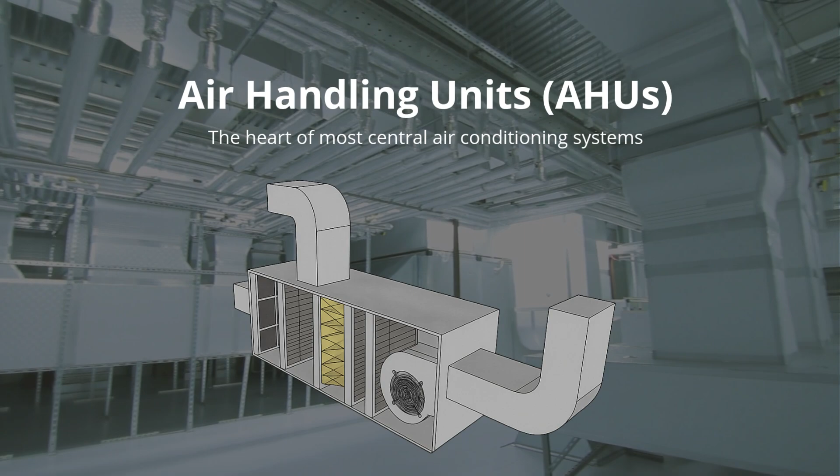Air handling units, or AHUs, are essentially the heart of most central air conditioning systems. They regulate airflow, temperature, humidity, and air quality, making them critical in a wide range of environments.

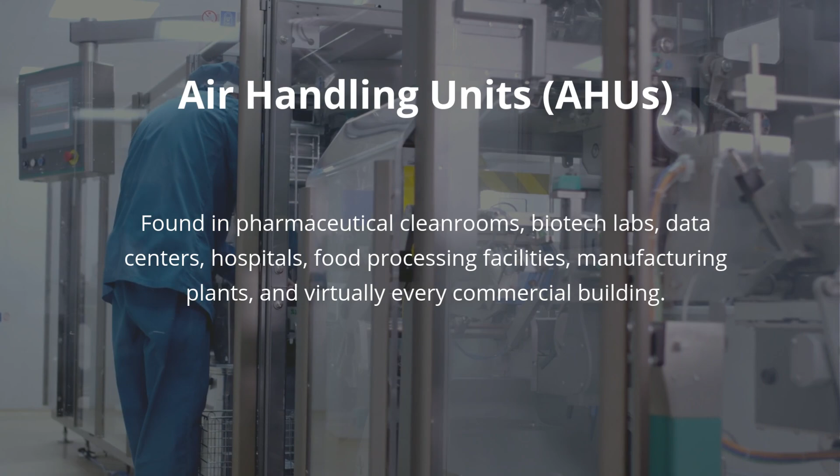You'll find AHUs in pharmaceutical cleanrooms, biotech labs, data centers, hospitals, food processing facilities, manufacturing plants, and virtually every commercial building.

In many of these applications, even small deviations in environmental conditions can lead to product quality issues, equipment failures, and compliance risks, which is why effective monitoring and maintenance of AHUs is so important.

Monitoring air handling units comes with a unique set of challenges. Here are the primary issues we've encountered and how to overcome them.

Challenge 1: Inaccessibility. AHUs are often fully enclosed and located in hard-to-reach areas. This makes it nearly impossible to access key monitoring points like the bearings while the machine is running.

And trying to place a wireless sensor inside the AHU usually doesn't work out, as the metal housing and internal obstructions often block wireless signals from getting in or out.

The solution is to use a hybrid wireless and wired setup. We can mount a wireless transmitter on the outside of the AHU while wiring sensors directly to the internal components, like motor or fan bearings.

Challenge 2: Multiple fault modes. Mechanical issues like bearing wear or belt misalignment are only part of the picture. It's recommended to monitor additional parameters like airflow and motor health, especially in regulated environments like pharmaceutical manufacturing.

The solution is to take a holistic monitoring approach that captures vibration, temperature, motor current, and differential pressure to catch mechanical, electrical, and process-related faults, including clogged filters.

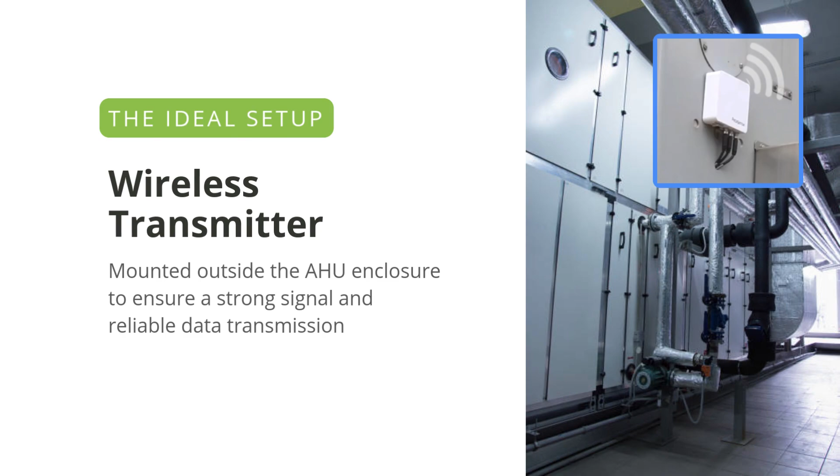A wireless transmitter is mounted outside the AHU enclosure to ensure a strong signal and reliable data transmission. Inside the unit, wired industrial sensors such as vibration, temperature, or differential pressure sensors are placed at key components like the motor and fan bearings.

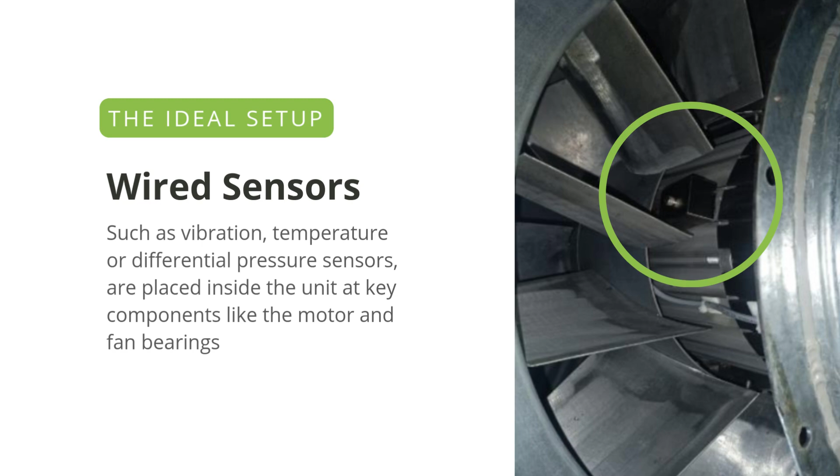If the AHU is driven by a variable frequency drive or a VFD, it's important to also capture running speed data. This can be done using a magnetic flux sensor mounted on the motor or by integrating speed signals from a building automation system or a process historian.

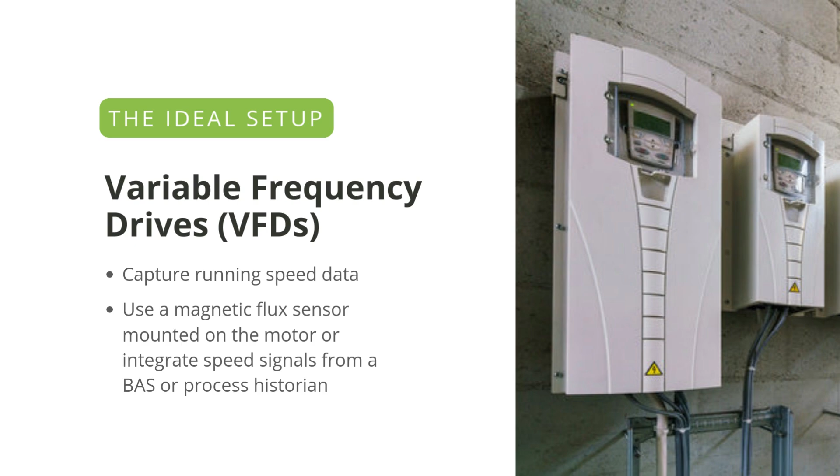This setup allows you to collect all the critical condition data and transmit it wirelessly for real-time analysis. It also provides the context needed to diagnose faults accurately and detect emerging issues as early as possible.

Here are some real-world examples of how facilities have used this exact monitoring setup to identify and resolve AHU issues before they led to failure.

At a pharmaceutical R&D facility, a critical air handling unit began showing subtle signs of abnormal vibration. The unit was responsible for maintaining temperature and air quality in a cleanroom, an environment where even a small deviation

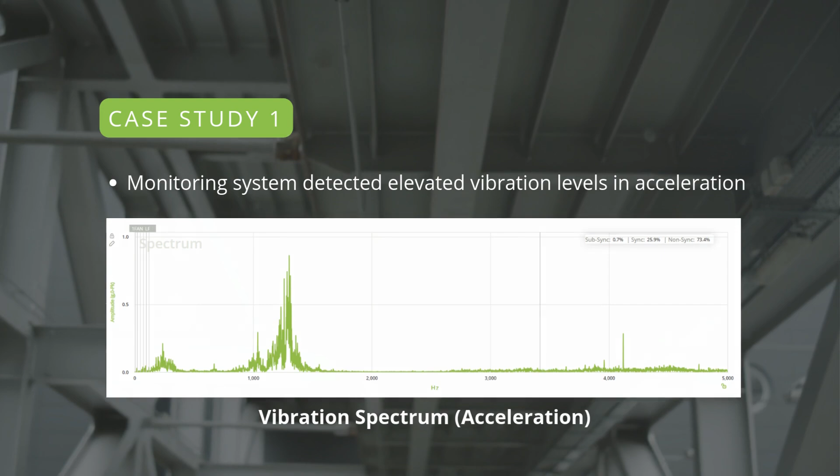in airflow or humidity could disrupt testing protocols and compromise product integrity. The monitoring system initially alerted the team about elevated vibration levels in acceleration, along with abnormal crest factor and demodulated spectrum values, all pointing towards a potential bearing fault in the motor.

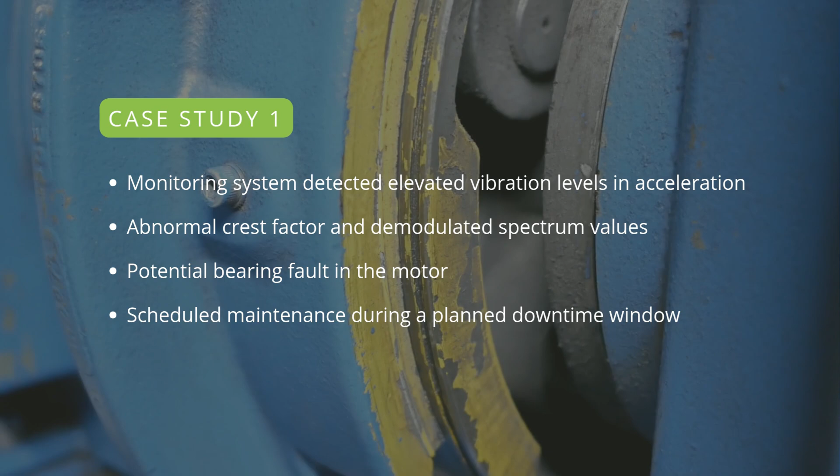Because these changes were caught early, the site was able to schedule a quick maintenance intervention during a planned downtime window. After the bearing was replaced, vibration levels dropped significantly from 1.6 G to 0.2 G.

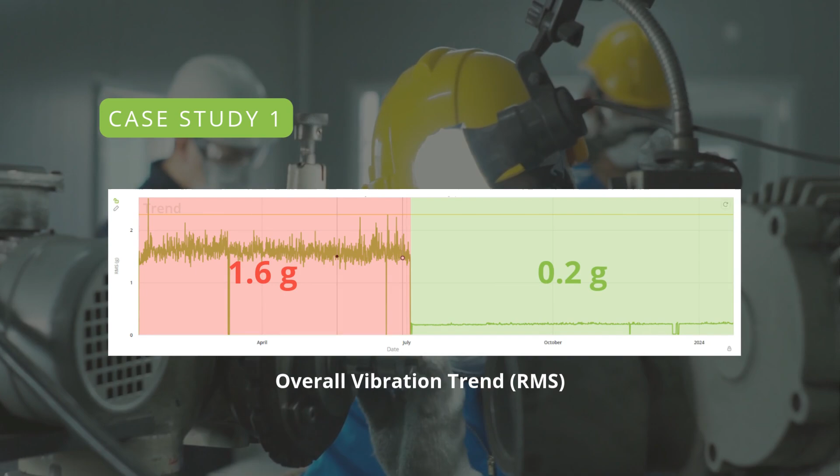This validated both the diagnosis and the impact of early action. More importantly, it prevented what could have been an unexpected shutdown of cleanroom operations, preserving productivity and regulatory compliance.

At another facility, engineers began noticing abnormal vibration patterns coming from an AHU fan motor. The overall vibration level wasn't excessive, but the vibration spectrum showed a persistent 2x belt frequency.

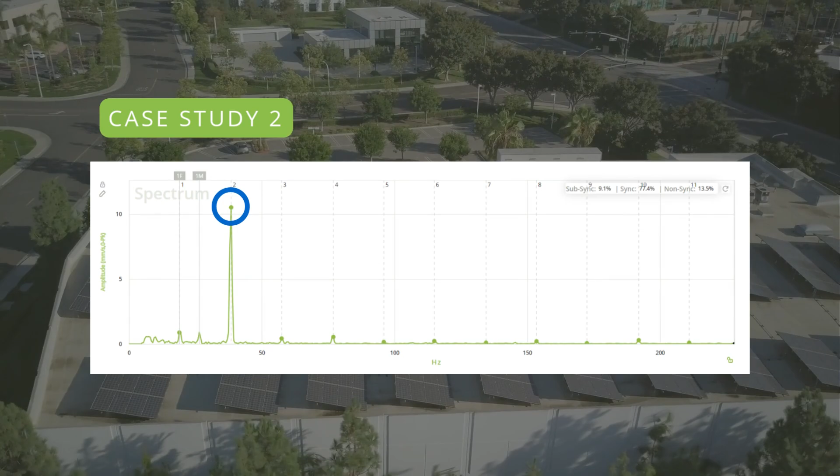This kind of signature often points to issues with belt wear, tension, or alignment, all things that can lead to increased energy use, overheating, and eventually a catastrophic failure.

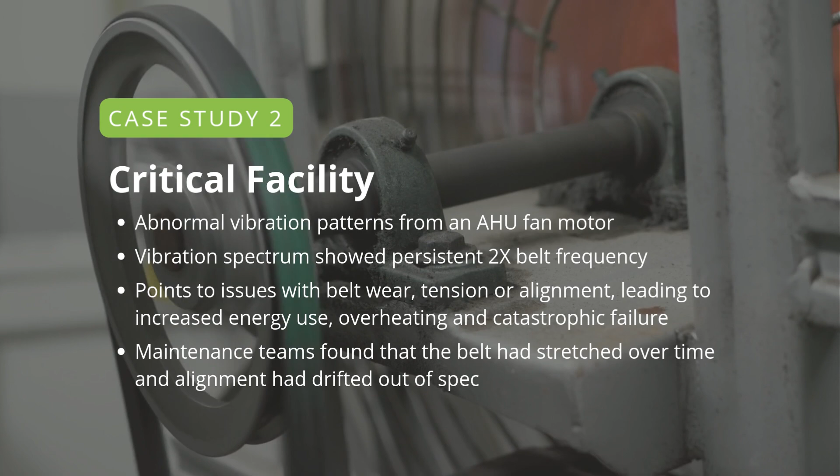Maintenance teams took a closer look and discovered that the belts had stretched over time, and the alignment between the motor and fan pulleys had drifted slightly out of spec. By correcting both issues, the facility was able to restore normal operation and eliminate the risk of a potential failure down the road.

Sometimes, the root cause of a machine health issue isn't mechanical, and that's where multiple parameters come in handy. In this case, an AHU began showing a gradual increase in vibration at the motor drive end. At the same time, the system also saw a rise in differential pressure across the filter.

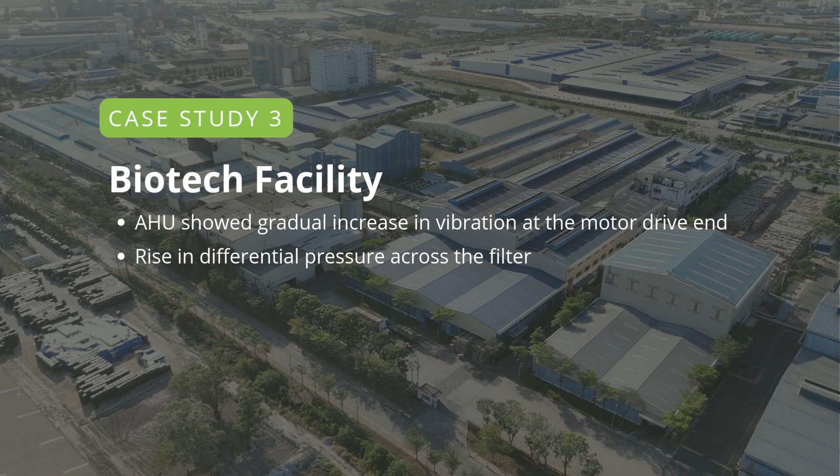These two trends together triggered a maintenance notification, and upon inspection, the team found that the filter was completely clogged with dust and debris due to nearby construction, which caused excess dust buildup.

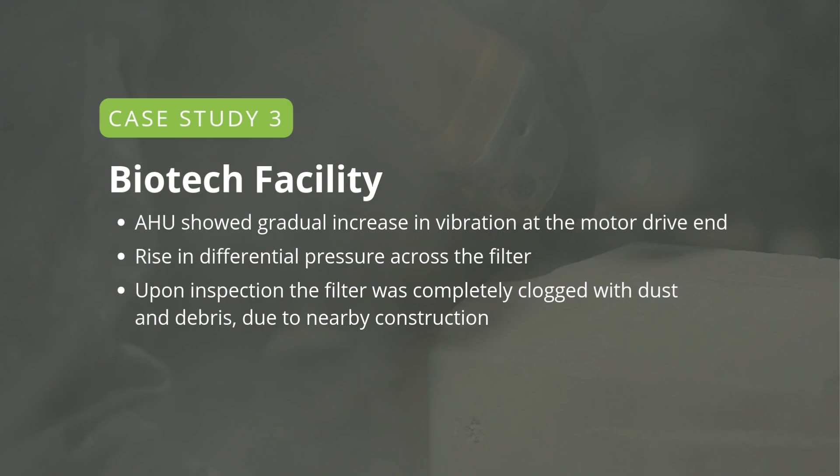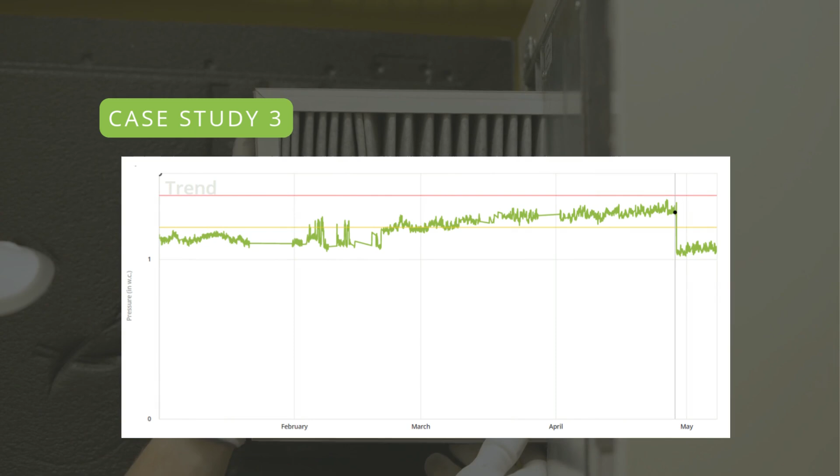If left unchecked, the clogged filter could have restricted airflow, caused motor overload, or led to temperature and humidity controls being thrown off. But with early detection, the team was able to change the filter, rebalance the belts, and bring the system back into optimal range, avoiding both equipment damage and product risk.

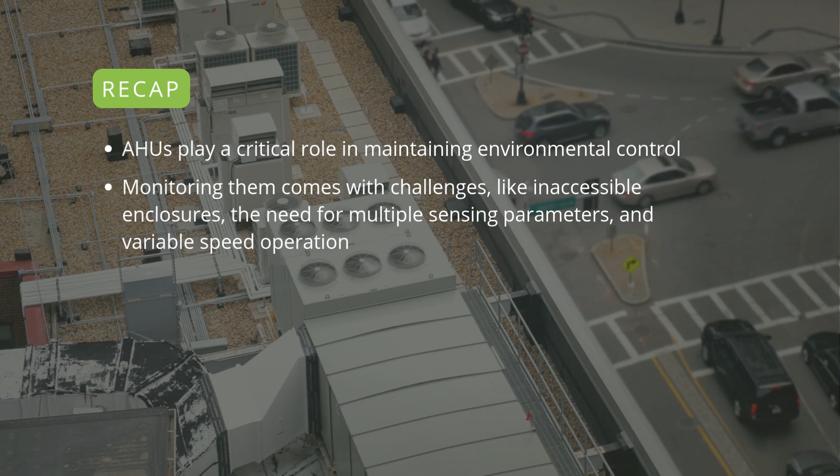Now let's quickly recap what we covered. AHUs play a critical role in maintaining environmental control, especially in clean rooms and other regulated facilities. Monitoring them comes with challenges, like inaccessible enclosures, the need for multiple sensing parameters, and variable speed operation.

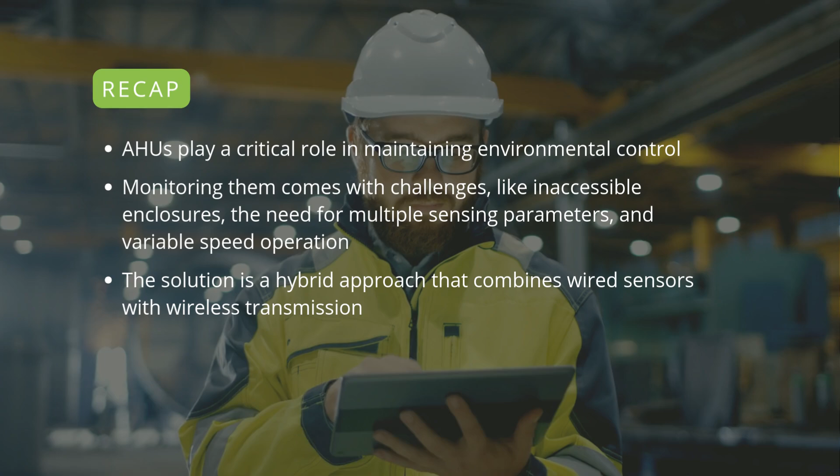The solution to many of these challenges is a hybrid approach that combines wired sensors and wireless transmission for comprehensive data collection and real-time insights.

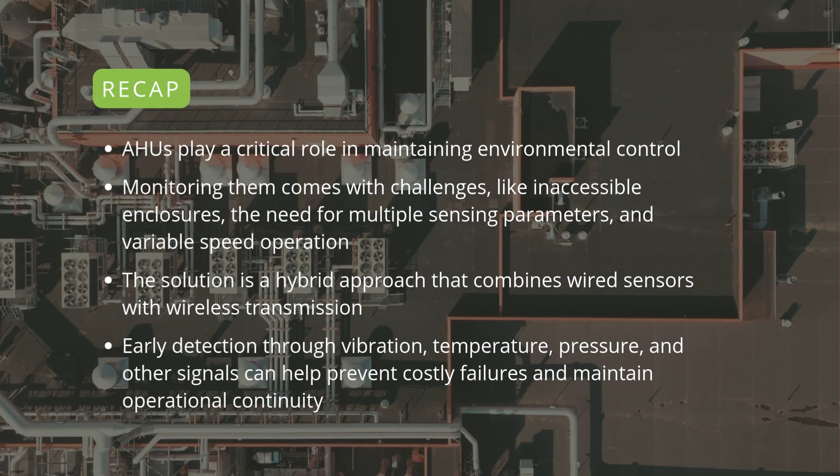And as we saw in various real-world scenarios, early detection through vibration, temperature, pressure, and other signals can help prevent costly failures and maintain operational continuity.

When it comes to air handling units, the key to smarter maintenance isn't just more data. It's the right data, in the right context, delivered early enough to take action.

By using a holistic monitoring strategy, facilities can reduce the chance of unplanned downtime, protect their critical assets, and stay ahead of potential failures, all while gaining better control over HVAC performance.